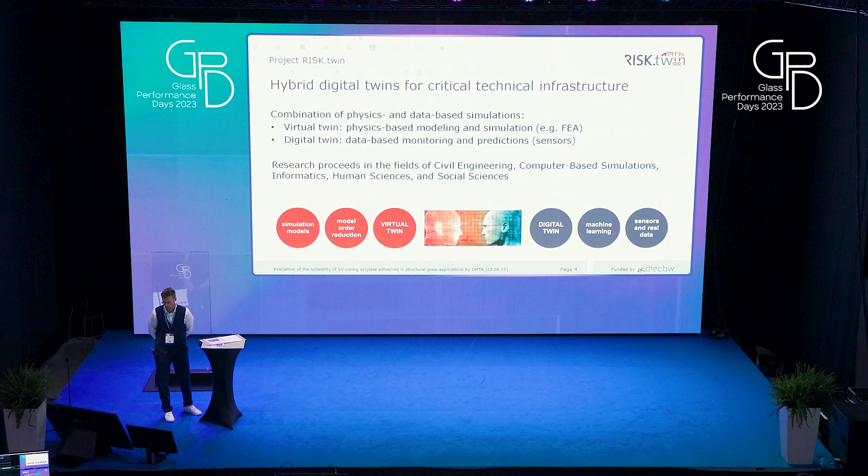So the general research project, RISK.twin, deals with hybrid digital twins for critical technical infrastructure. Probably many or all of you already have heard of digital twins in whatever context. But in fact, there is no single definition of a hybrid digital twin. So here's our definition. At first, the hybrid digital twin consists of the virtual twin and the digital twin. And here may already be misunderstandings, since we often talk only about the digital twin and not the hybrid digital twin. But the hybrid digital twin actually consists of the virtual twin, which is physics-based modeling and simulation, usually using finite element analysis, and the digital twin, which is data-based monitoring and predictions using sensors.

In total, we are 15 researchers in the fields of civil engineering, computer-based simulations, informatics, human sciences, and social sciences. And in the end, we want to be able to evaluate and quantify the consequences of unexpected or rare situations and identify the right reactions. And as I said, not only in the engineering area, but also from an economic, social, and political point of view. And we therefore need detailed information about the actual situation of the structure after extreme events. And so to speak, as a positive side effect, we obtain optimized maintenance during service life.

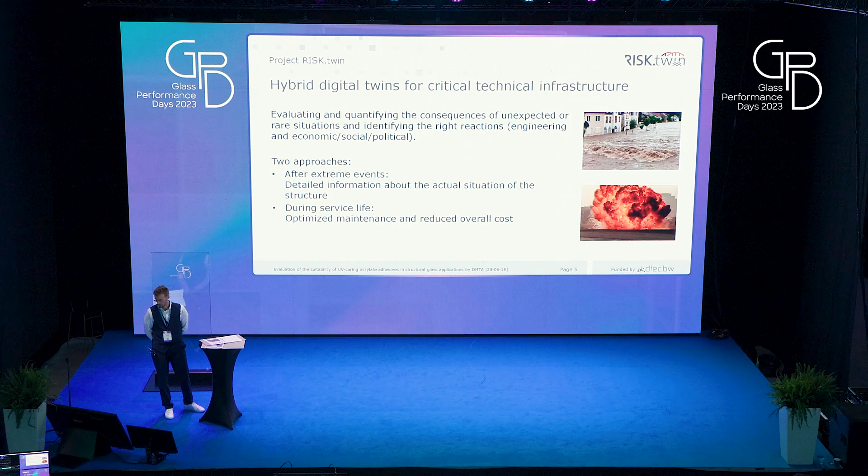Now you may be wondering what UV curing acrylate adhesives have to do with the whole matter. But you probably will agree that glass is still used comparatively conservatively in building construction. And this is also related to the kind of connection to the substructure. And so if we want to connect the glass to the substructure by adhesives, we can usually only refer to the ETAG 002. So I will give a short introduction, since I don't know your expertise in this area, so to get us all on the same level.

There are some basic restrictions and specifications of the ETAG 002, which states that you can apply the guideline only to rectangular glass panes, and the bond has to be in the form of a linear bead. Next, adhesion on 3 surfaces is not allowed, because that would cause volumetric stresses and therefore be a cavitation-sensitive joint. And additionally, in Germany, and I think in a few other countries, a mechanical self-weight support is necessary. So type 3 and type 4 are not allowed.

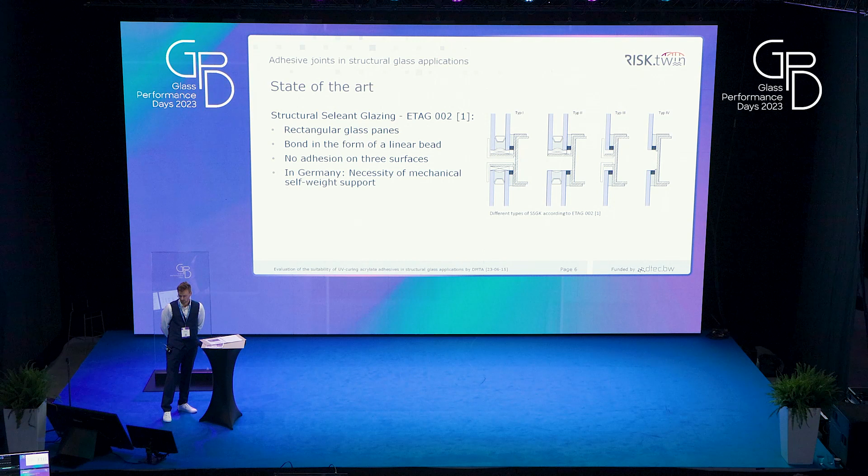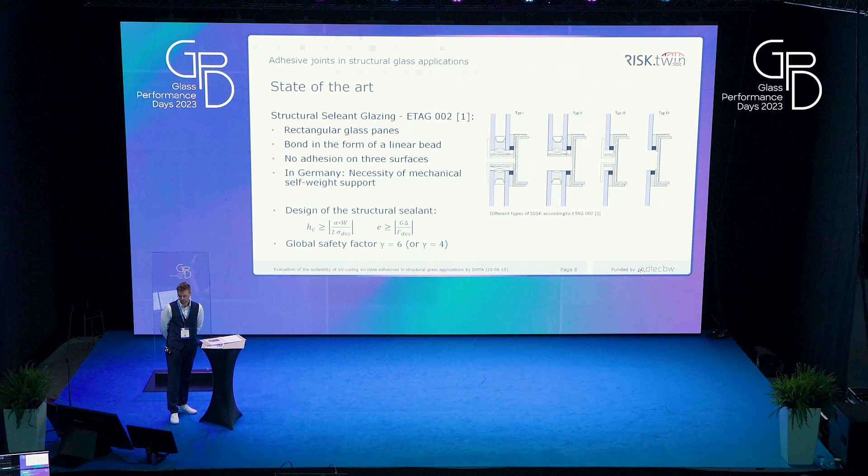Regarding the design, the ETAG 002 provides an allowable stress design method where you insert your loads with the W in the left-hand formula and the G in the right-hand formula, and then get directly your dimensions of the silicone bond. And after that, you have to divide your allowable stresses by a global safety factor of 6, or if you do a more precise numerical computation, you can reduce this factor to 4.

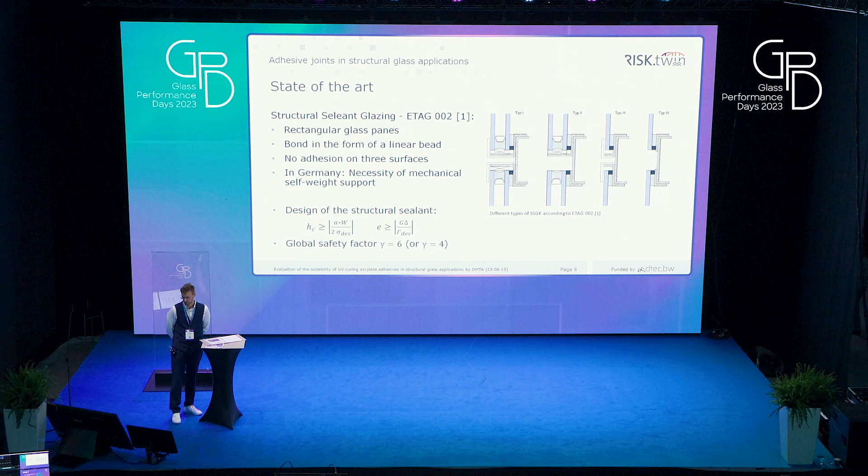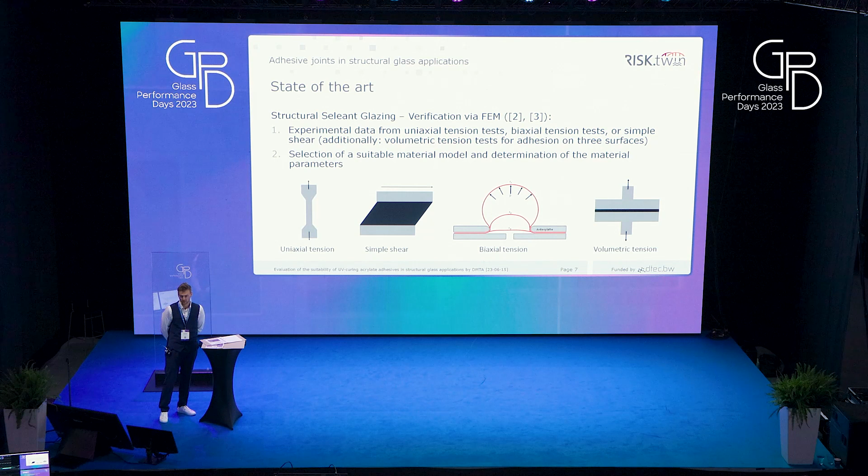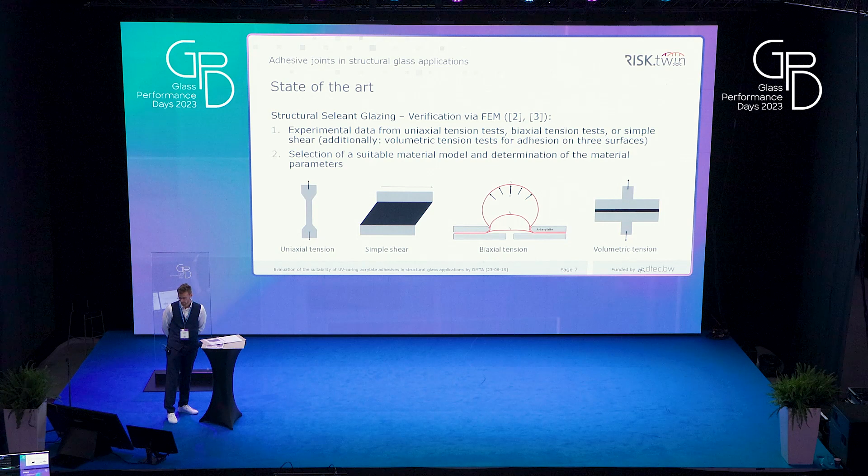Now, of course, research has been done in recent years around that topic. For example, approaches with a semi-probabilistic safety concept or a verification via finite element method, which I would like to introduce here. For this, we need, of course, experimental data, which we get from uniaxial tension tests, biaxial tension tests, or simple shear tests. And this volumetric tension test becomes necessary if you have adhesion on 3 surfaces. And after these tests, we need to select a suitable material model and determine the material parameters. For silicone, this is usually done by hyperelastic material models such as Neo-Hooke or Mooney-Rivlin or stuff like that.

And then you probably know that we need a test to calibrate the material model and another one to validate the material model, which is done by the modified ETAG H specimen. Why modified? Because we need to test our actual dimensions of the silicone bond, which we want to apply in the building or whatever. And after the tension tests, we have to recalculate it.

And then we are able to calculate the global model with our actual occurring loads. And here it is very important that we use the same fixed mesh densities, because these models usually show a mesh dependency, and we want to exclude the influences from this.

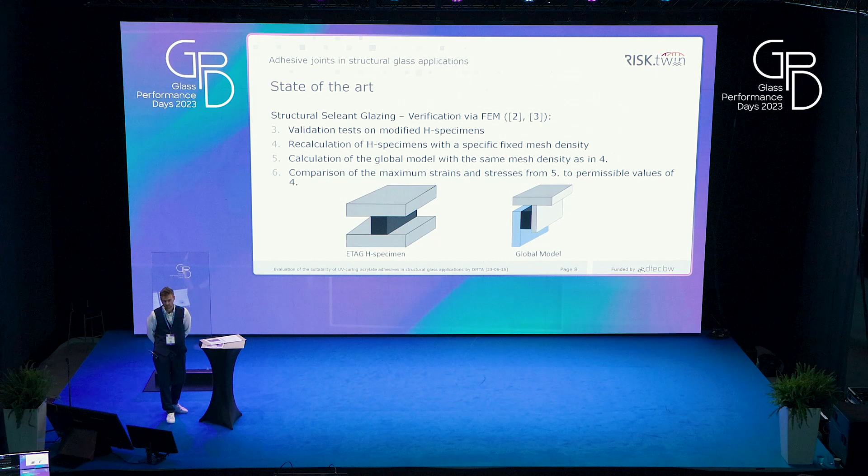And then we are already able to compare the maximum occurring strains from the global model of point number 5 and compare them to the allowable stresses and strains from point number 4, which already contain the global safety factors. So you see, this approach still uses global safety factors.

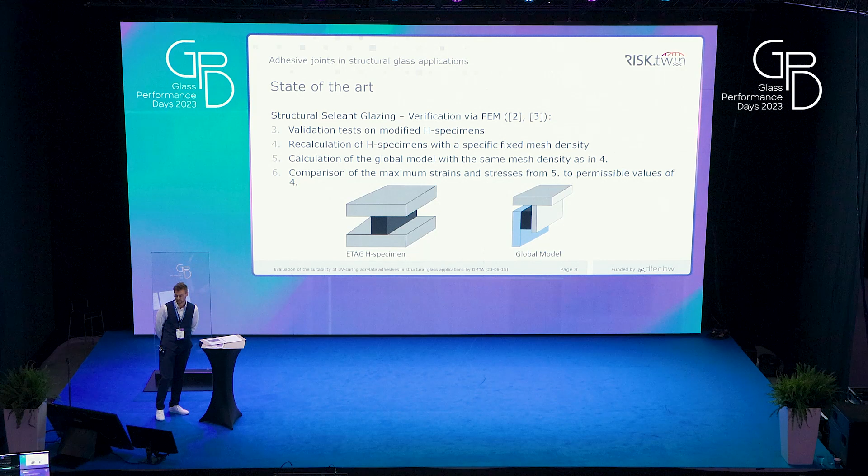And as I said, there are a few other approaches that have been investigated. But I don't want to go any further into detail here, because what is important for us, this is an approach where we can tie up with other adhesives. So we need material tests, which of course should be as easy as possible. And we need specific material models, and then we can do our calculations using FEM.

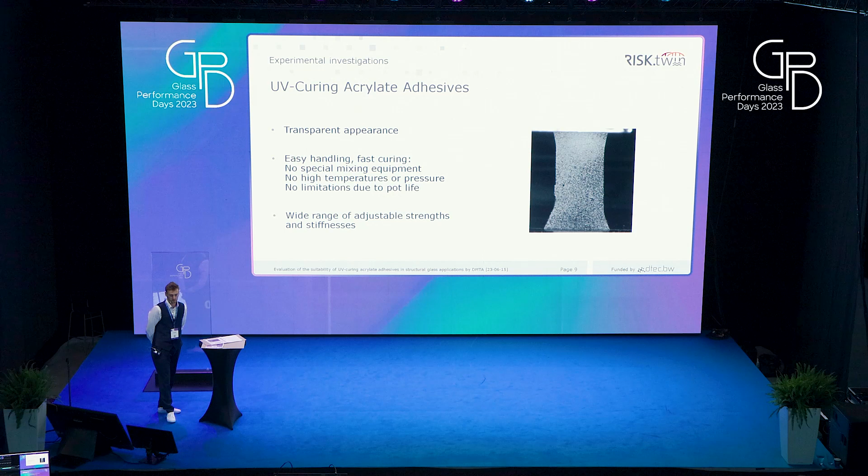And why do we consider UV curing acrylate adhesives as promising? At first, of course, they have a transparent appearance, which is to some extent a basic requirement for us in glass construction. And then they combine the advantages of an easy handling and a fast curing. So we don't need any special mixing equipment, we don't need high temperatures or pressure, and we are not limited in pot life. So we can cure them quite easy and really fast.

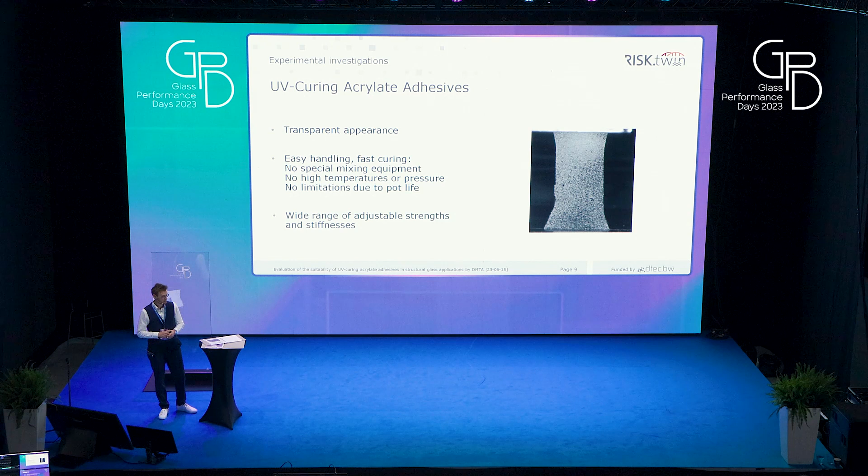And additionally, they allow a wide range of strengths and stiffnesses to be adjusted. To demonstrate this, we can have a look at some uniaxial tension tests which we performed. And as we can see, we can get quite long elongations using acrylate adhesives. And here the adhesive is of course not transparent, because we sprayed it with a speckle pattern for the digital image correlation, which we use to measure the strains.

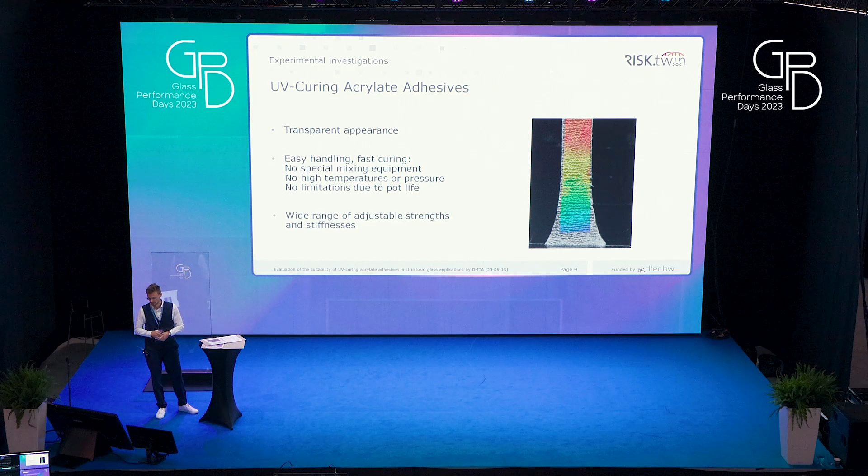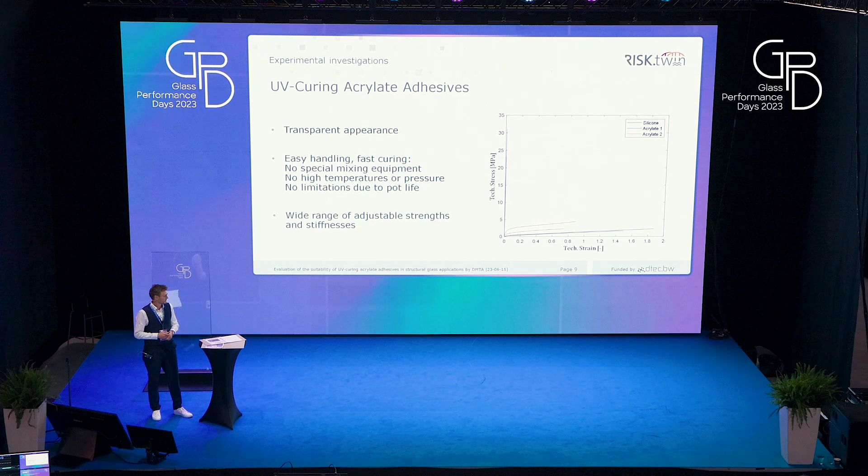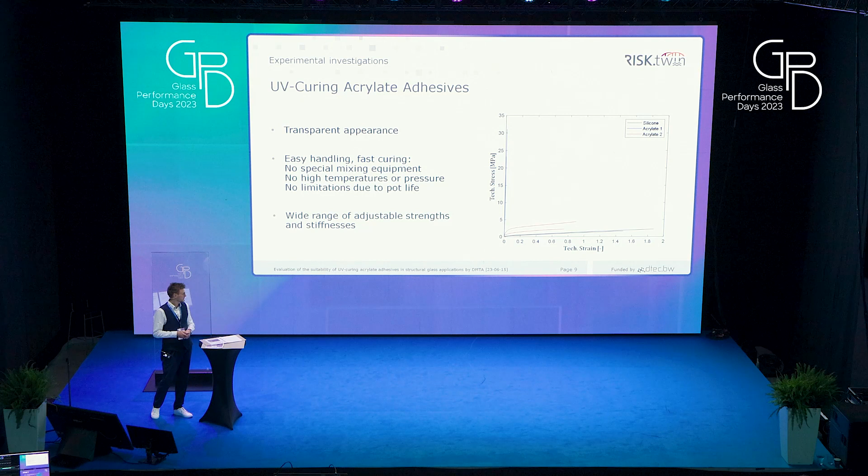This adhesive we just saw here is the red one in this picture. And as you can see, the maximum strains go nearly up to about 100%. The black line below represents a structural silicone, and here the elongation is even larger, but as you can see, at a significantly lower level in strength. And the third one, which I called acrylate 1, which I don't know if you can see, but it's the blue one right next to the y-axis. And so the difference between the blue one and the red one is the wide range of strengths and stiffnesses, which I was talking about.

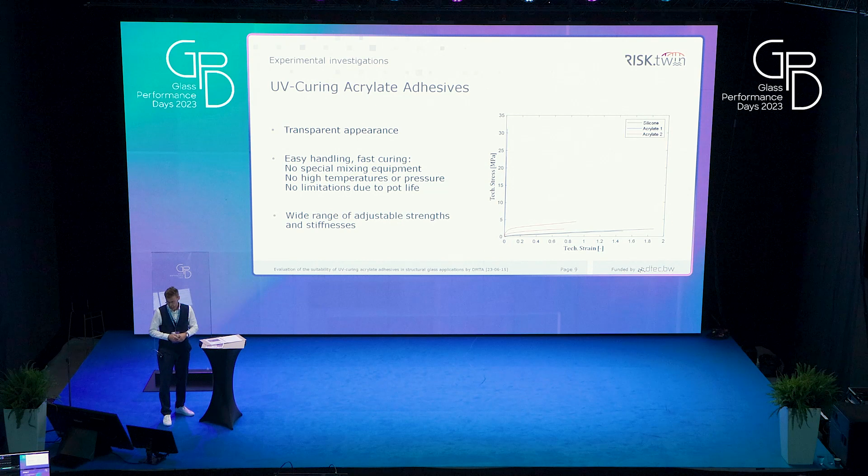Let's have now a closer look at these tests, where again, acrylate 1 is the very stiff one, and acrylate 2 is the red one, which was in the middle. And we tested them in tension mode under different strain rates to consider their time dependency. And as you can see, with the very stiff one, the curves almost are exactly above each other, so there's no time dependency, in contrast to acrylate 2, where we have a significant difference between the two curves, so the adhesive reacts much stiffer under faster deformation.

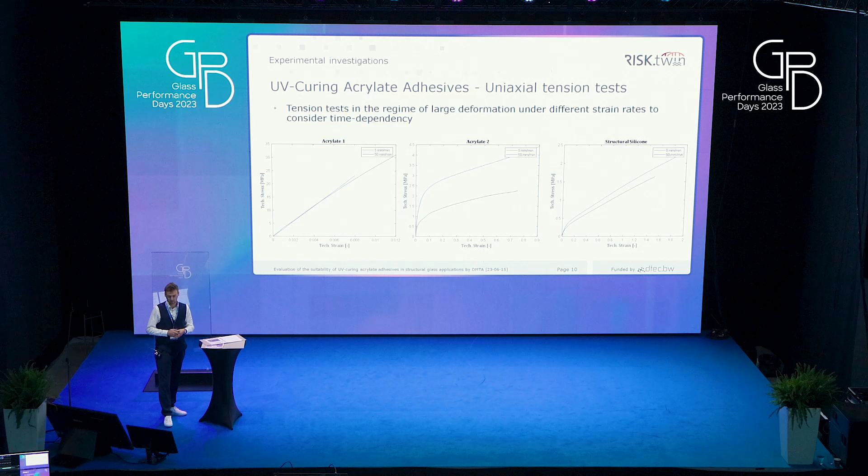And if we now compare the maximum stresses, acrylate 1 is nearly about 10 times higher than acrylate 2, but acrylate 2 still is about twice as high as the structural silicone. And as we can see, the material behavior of the acrylate 2 is quite complex and some kind of viscoelastic. And to further investigate this, we performed dynamic mechanical analysis on this.

What do we actually do in this test? We apply a harmonic strain controlled excitation on the bulk material at different temperatures. So in our tests, we started at 80 degrees Celsius and tested the adhesive in a logarithmically scaled distribution from 0.5 hertz to 50 hertz in frequency, and repeated that every 5 Kelvin until we reached minus 20 degrees Celsius. And as a result, we obtained a time and temperature-dependent material behavior, resulting in the so-called Prony series for our viscoelastic material model.

So to illustrate this, we can see in the bottom picture on the right-hand side the strain excitation plotted blue. And for a viscoelastic material, as we have here, there is a phase lag between the excitation and the stress response of the material, which we call the phase angle delta. And with this phase angle delta, we can span a triangle in the complex plane in the upper picture with the so-called storage modulus and loss modulus, where the storage modulus represents the elastic part of the material behavior and the loss modulus represents the material damping behavior. And together they are combined in the complex modulus.

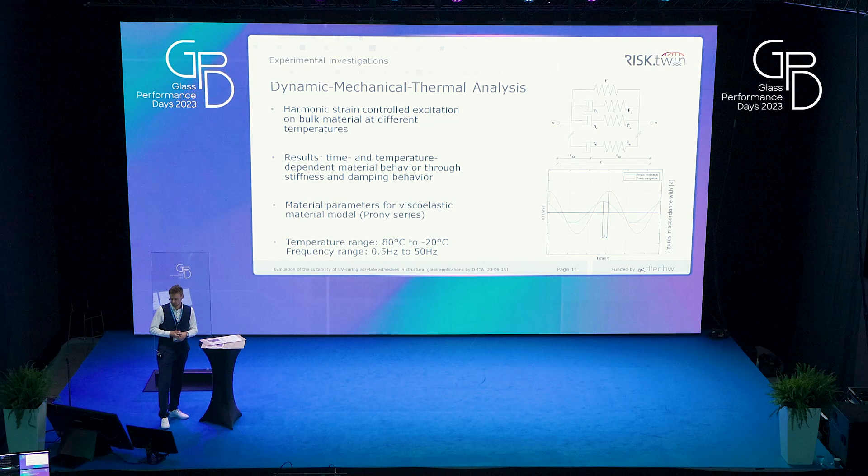Regarding the material model, this is usually referred to as the generalized Maxwell model, which consists of a single spring to represent the elastic part and a number of Maxwell elements containing damper elements to represent the viscous part.

Another interesting plot is to plot the results over frequency. So here now, every line represents a specific temperature, whereas in the picture before, every line represented a frequency. And again, we can see here the constant behavior of the silicone.

And now you can see that I actually lied to you, because for acrylate 1, I said we have no strain rate dependence. But this is actually valid only for lower temperatures up to 20 or 30 degrees Celsius. And the lowest blue line is the line for 80 degrees Celsius, and here we actually have a difference between 0.5 hertz and 50 hertz.

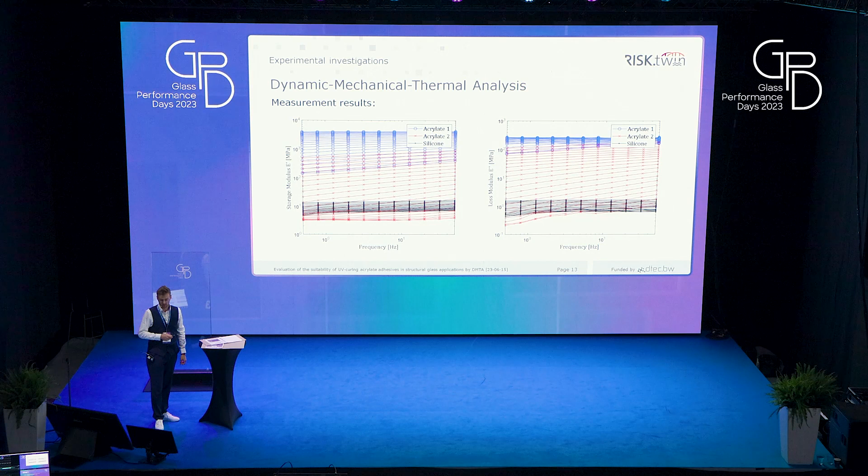With these curves now, we can make use of the so-called time-temperature superposition principle, which states that the long-time relaxation at lower temperatures is equivalent to the short-time relaxation at higher temperatures, which allows us to build a so-called master curve and get the results over a much wider frequency scale. You can imagine this by just shifting the curves to the next curve for a chosen reference temperature, which we chose to be 20 degrees Celsius.

So all lines that are above the line of 20 degrees Celsius are the temperatures that are lower than 20 degrees Celsius and therefore are stiffer. And now we shift them to the right until it lies exactly above the next curve. And we repeat this until we get one single curve.

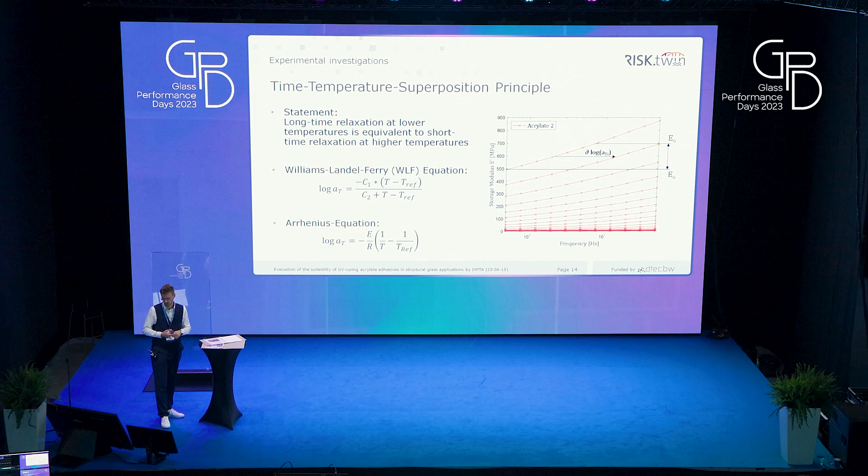And the shift factor is usually obtained from either the Williams-Landel-Ferry equation for temperatures above the glass transition temperature, or the entropy elastic region, or the Arrhenius equation, which is used for the energy elastic region. So now applying this to both our adhesives, we get the following curves, acrylate 1 on the left-hand side and acrylate 2 on the right-hand side. And to these curves, we now can fit our Prony series.

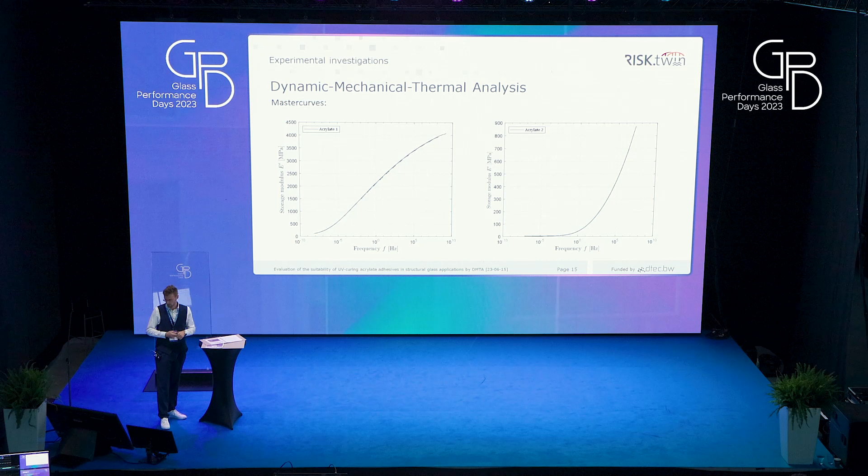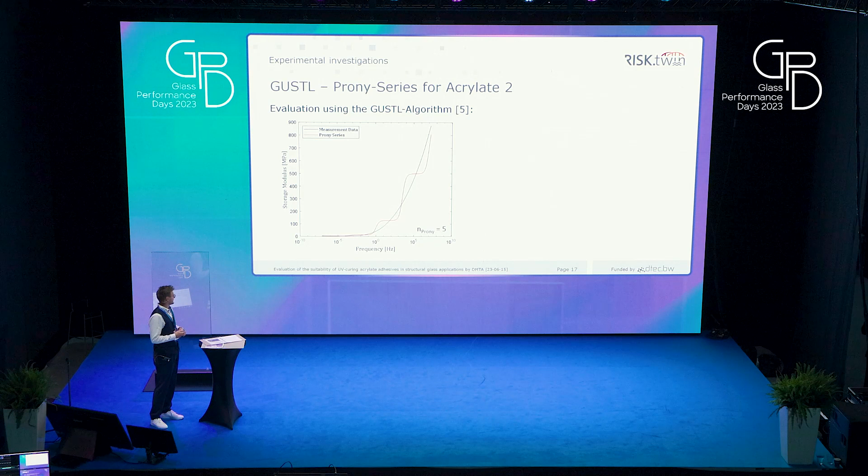And as I said, we need a specific number of Maxwell elements. So if we tried to fit the curve with a number of 5 elements, since the single elements have only a specific area of influence, the curve is not fitted very well. But if you use a number of 13 elements for Acrylate 1, the depiction is quite good. Same thing for the second adhesive. Again, 5 elements, not sufficient, but here with 12 elements, the depiction is again very good.

Now, regarding the material modeling in finite element software, for our state of research for now, we model Acrylate 1 with a linear elastic material model because of the results of the uniaxial tension tests. And Acrylate 2 shows a clearly viscoelastic material behavior. And it is important to mention that it shows no plastic deformation after unloading. So a viscoelastic material model is the right choice.

And therefore, I would like to warmly recommend to you the presentation of my colleague, Mr. Alexander Pauli, tomorrow at 11 a.m. at this stage, who will show you the numerical modeling of UV curing acrylate adhesives.

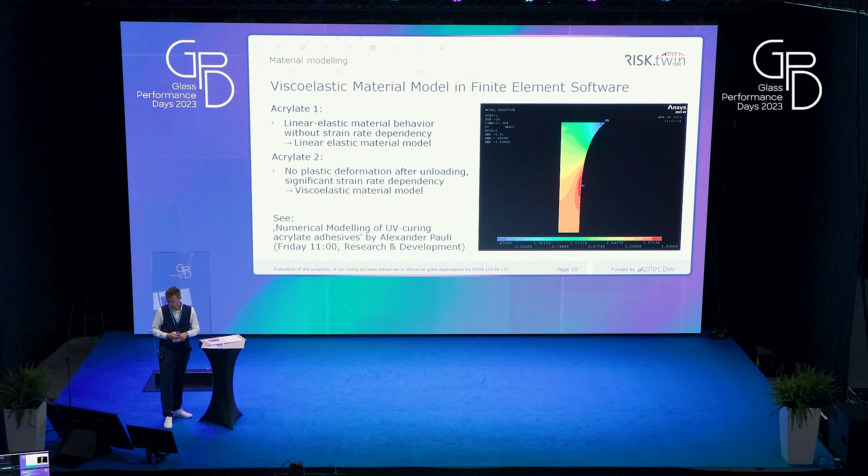Now, to close my presentation, I will have a short outlook. So we could actually not figure out any general limitation of UV curing acrylate adhesives, but there are, of course, some challenges which we need to face. At first, a more constant behavior over the whole temperature range would be desirable, and we haven't done any aging tests on the materials so far. So especially, we need to investigate this in glass to steel connections, because then adhesive failure might occur, which we don't have, of course, in material tests on the bulk material.

So the adhesive in the center of the point fixing should be a very stiff one, which is actually responsible for the load transfer. And the one in the circular ring around the other adhesive should be softer, to be able to carry some dead load or stuff like that in case the stiff adhesive fails for whatever reason that is not expected.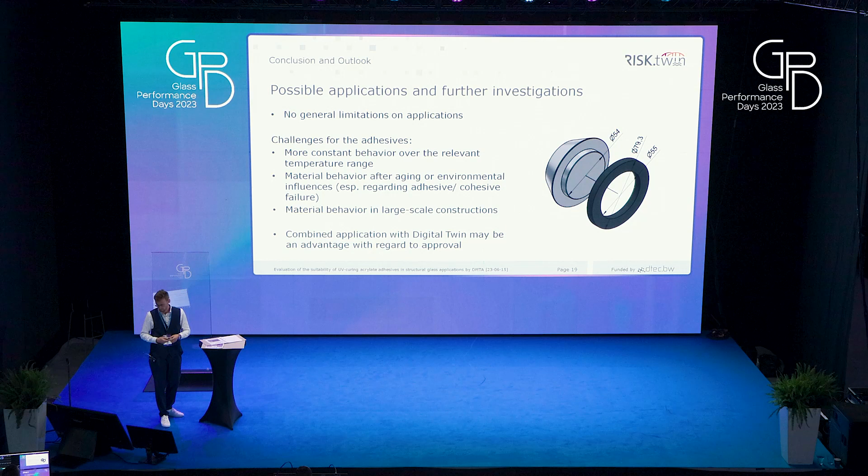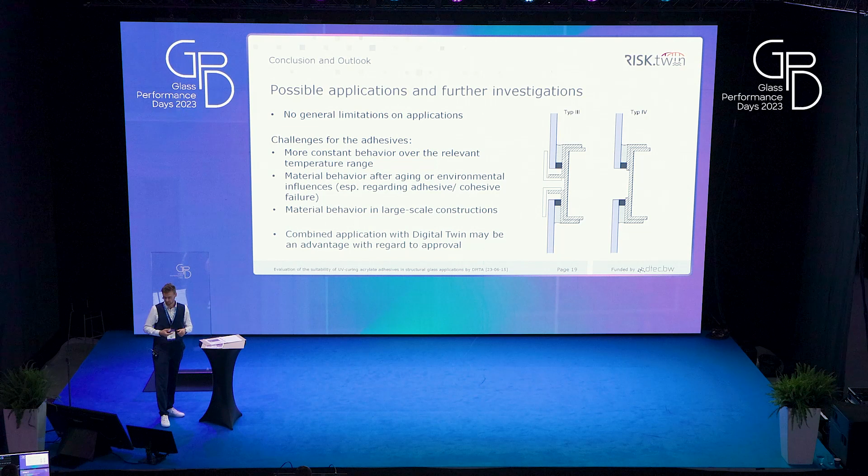And with that, why not go for other connections like linear bondings, for example, type 2 and type 4 of the ETAG 002. And now to close the arc to the beginning of my presentation, we hope to gain further arguments regarding approval with the redundant point fixing on the one hand and with the digital twin on the other hand.